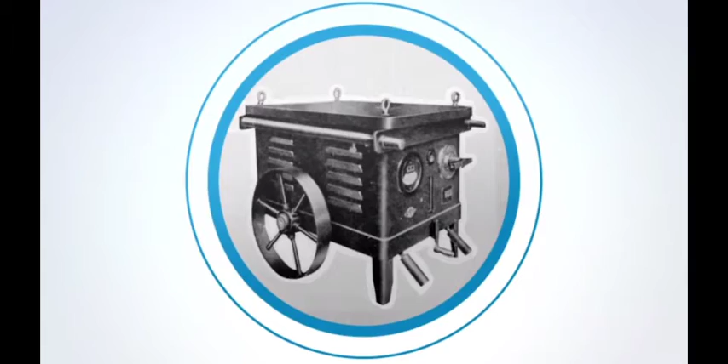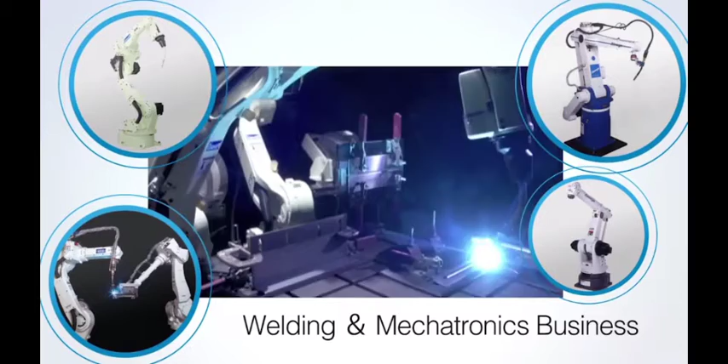In 1919, Daihen was established as Japan's first manufacturer of pole-mounted power transformers. Since then, Daihen has been providing many ultra-advanced technologies. We produce high-performance welding machines, utilizing all of our accumulated electronic technologies. And we produce industrial robots to meet increased automation needs. We have consistently developed semiconductor manufacturing equipment to meet the rapid progress of the electronics industry.

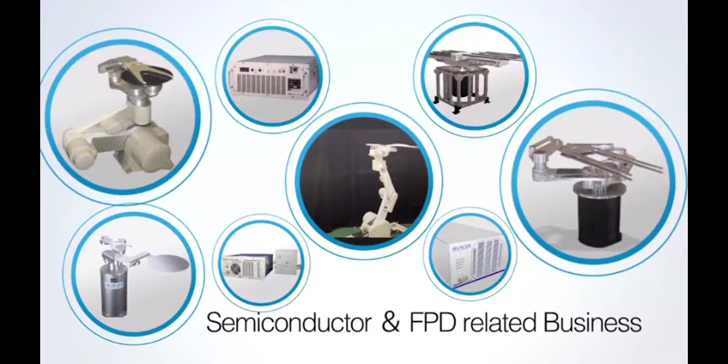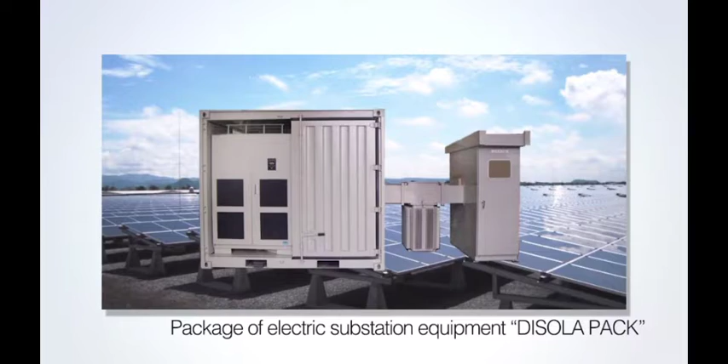And now, we are applying the technologies we have perfected in the highest levels of industry to the development of power conditioners for solar power generation, and generators for wireless power transfer, such as wireless battery charging for electric vehicles.

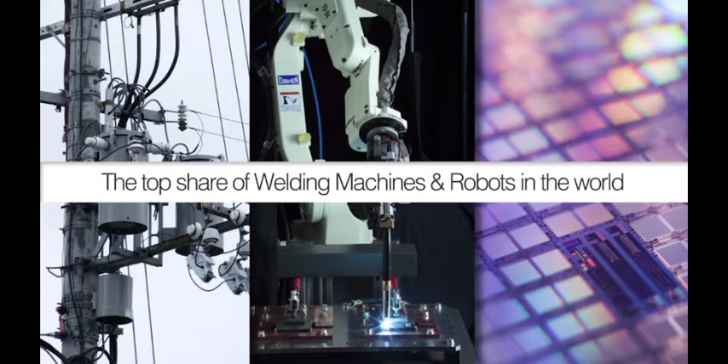Beginning with transformers, Daihen now leads the market in many fields, especially in the field of welding machines and industrial robots. We will continue to offer our technology with products to meet our customers' needs around the world. During this Automate 2015 show, we will introduce some of our high-performance products and solutions under the theme, Opening the New Era of Welding.

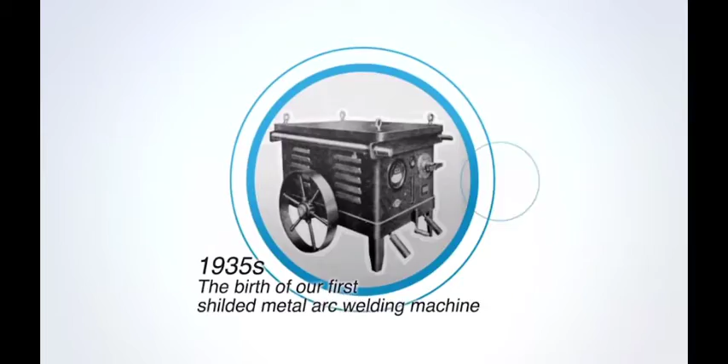First, let's begin with our Welbee inverter arc welding power sources. In 1935, Daihen delivered its first welding machine to the world, and we've been continually advancing our technologies. 15 years ago, we introduced our digitally controlled welding machine. Now, our welding control speed is 5,000 times faster.

After years of development, we've delivered our Welbee inverter series. Be Smart and Be Tough are the concepts of the Welbee product line. Welbee, the all-in-one welding machine, extensively improves welding efficiency. Welbee is low maintenance with the toughness to withstand the harshest work environments.

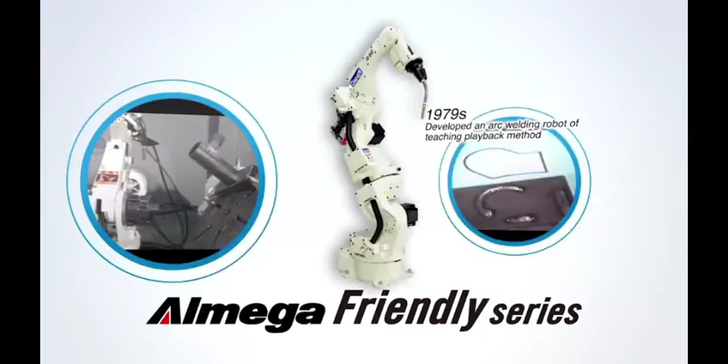Next is welding robots. In 1979, we developed our first teach and playback arc welding robots. Then, in 1991, we introduced the first Syncro motion control in the world for multiple mechanisms, including robots and peripheral devices. Now everyone can achieve high-quality welding with our latest FD-friendly series robots.

Our new wireless teach pendant, YTP, has improved controllability without cable interference. The 7-axis robot FD model enables the best welding posture for your job. Our new robot welding quality control system introduces the next generation of weld data monitoring and storage.

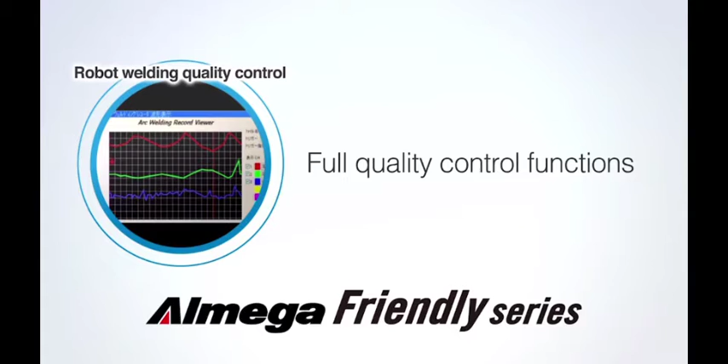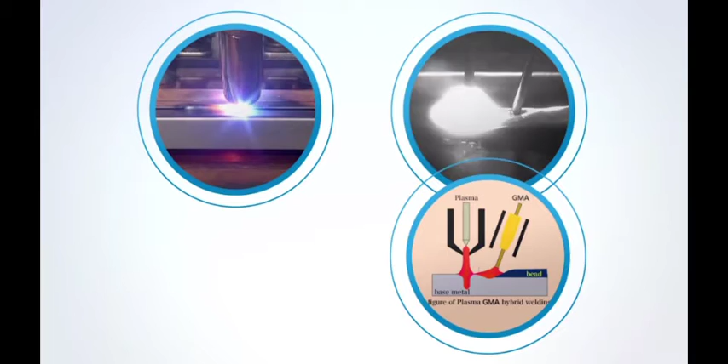Now, we will demonstrate our solutions for you, starting with the Welbee arc welding machines and FD-friendly series robots. With our extreme low spatter, low strain, high efficiency, and advanced quality control, we firmly believe our new arc welding solutions will satisfy even your most demanding requirements.

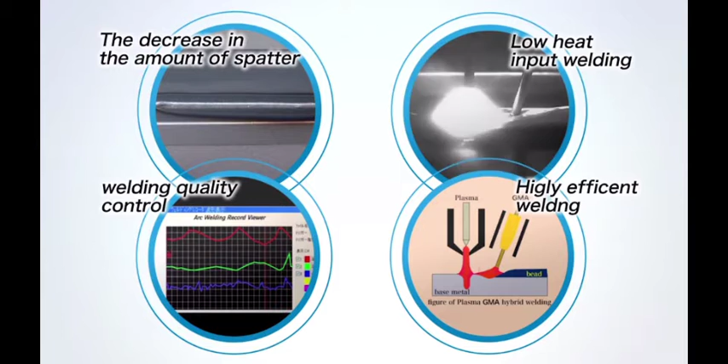All right, everybody, let's get this tour started. First, we would like to introduce our Ultraflex motion robot system. We will demonstrate the wireless teach pendant, YTP, and 7-axis robot, FD-B4S, which are newly developed by Daihen, the #1 arc welding robot manufacturer in the world.

The innovative YTP shown here significantly changes the conventional teaching operation. The user-friendly YTP eliminates the annoyance of the teach pendant cable and improves work efficiency. Furthermore, a single YTP can be used for multiple robots, teaching operation, and also as a monitoring terminal. Now, let us demonstrate.

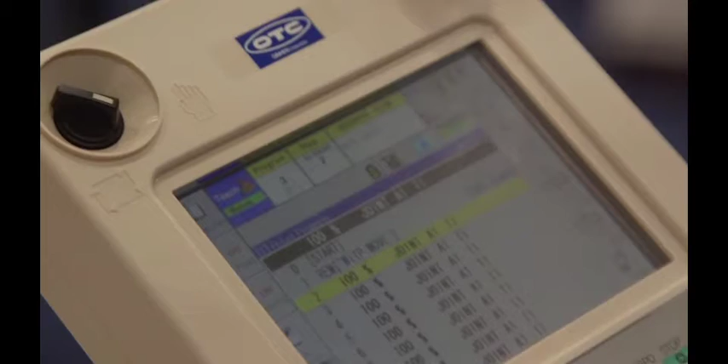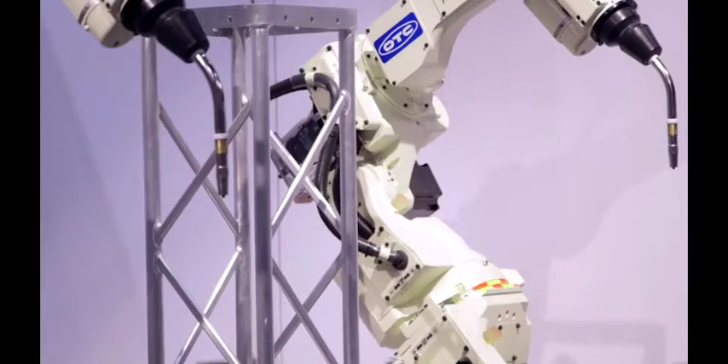As you can see, it can easily be operated without the interference of the cable, and it can control multiple robots. Next, we would like to introduce the 7-axis robot FD-B4S. On a conventional robot model, the welding power cable must be parallel with the robot arm. To your right is the 7-axis robot. Please look at the axis in the middle.

Daihen's 7-axis robot features a built-in power cable, giving it incredible flexibility for movement. Teaching a robot is not limited to the configuration of a jig or the layout of the parts. So now, let's show you what the 7-axis robot can do.

As you can see, there are no power cables interfering with the robot's work, allowing for a smooth, seamless operation. Next, please watch and compare the 7-axis robot movements to that with the 6-axis robot. To start, let's take a look at the 6-axis robot.

As you can see, the 6-axis robot has its limitation. When attempting this kind of part, it simply cannot make it all the way around to complete the job. And now, moving on from the 6-axis robot, I'd like to show you what the 7-axis robot can do. Please watch as the 7th axis comes into play.

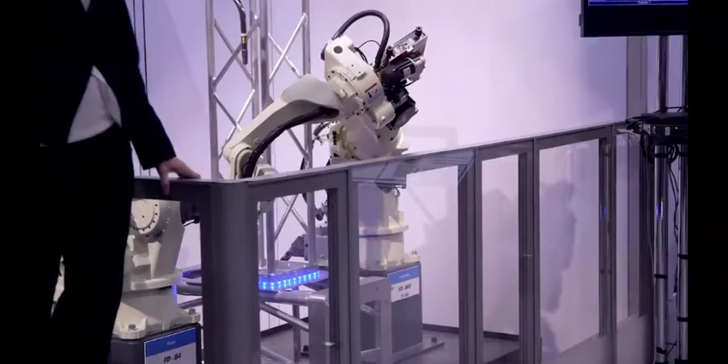As you can see, the 7th axis enables twisting more like a human being. Watch as the 7-axis robot tackles this difficult work scenario without a hitch, completing the full circuit. So what do you think? Can you see the potential for the 7-axis robot and its very high degree of flexibility?

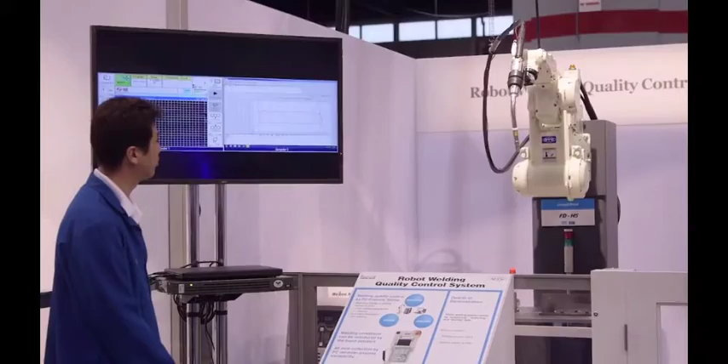The improvement of flexibility makes it possible to set the robot in a small space where existing models could not function. Now, let's move on to the next section. This section demonstrates our robot quality control system. We'll demonstrate 3 features of this welding quality control, including monitoring, storing, and analyzing.

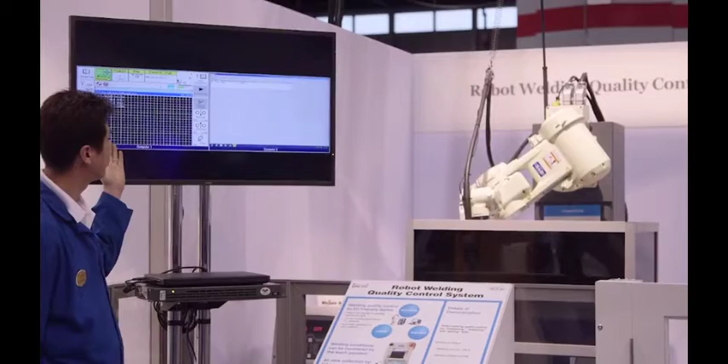Monitoring. During the welding operation, you can see the welding current, voltage and other welding data displayed as waveforms on the teach pendant. So now, let us demonstrate the welding operation, please. Please watch the right side monitor that displays the teach pendant screen. As you can see, the waveforms can be displayed in real time on the teach pendant, which is very effective in developing welding conditions.

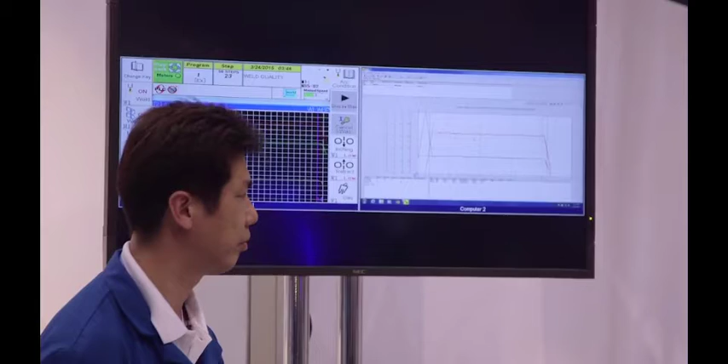Storing. You can collect current, voltage and other welding data at a high sampling frequency of 10 kilohertz, that's 10,000 times a second, and store them on a PC. As the information regarding when, where, what, and how are stored together, this data can be used for quality submission and for quality control as of ISO 9000.

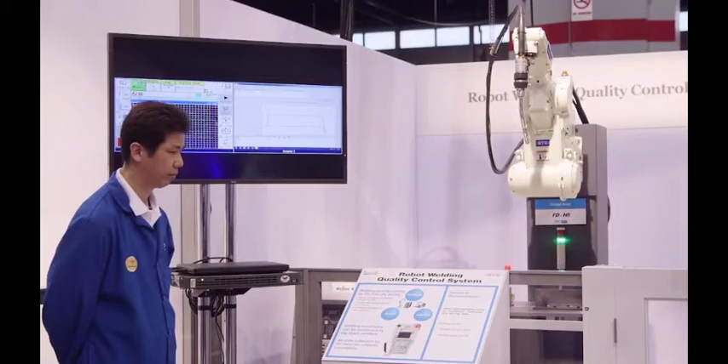Analyzing. Since any welding defects are automatically detected, the defective components on the next process can be avoided. In this demonstration, we have intentionally created a void in the plate, representing a defective part. Upon occurrence of a welding fault, an error is indicated on the teach pendant and the red blinking light illuminates. So now, let us demonstrate the welding operation.

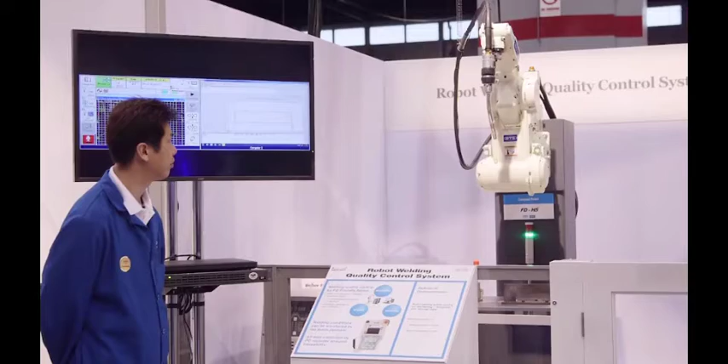In this way, any welding defect is detected, and these parts can be sorted, making it easy to rework the defective items. Furthermore, it is possible to view the waveforms of stored data to see the welding conditions. This will be useful for the identification of the cause and the prevention of the recurrence. Now let's move on to the next section.

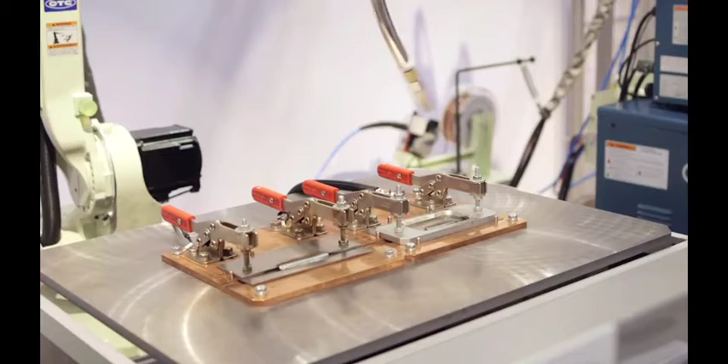In this section, we're introducing the Synchro-feed GMA welding system, our latest solution in providing low spatter welding with argon gas mixtures or even 100% CO2. This system consists of a super fast wire feeder control and a Welbee inverter P500L, which synchronizes optimal current with wire feeding. This is an ultra high quality welding system that reduces spatter like never before.

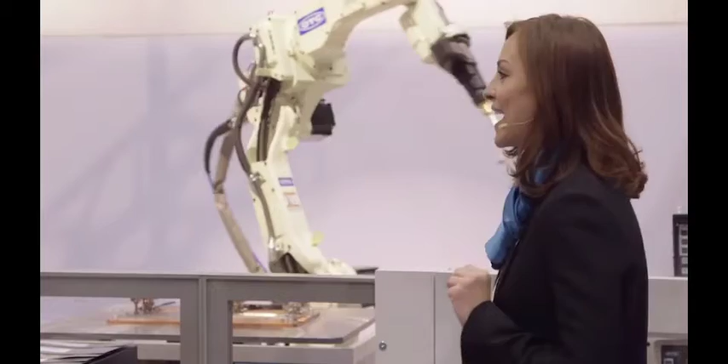In the first demonstration, 0.6 millimeter ultra thin mild steel plate is lap welded, common to automotive body welds and the like. The wire diameter is 0.045 inch, the welding current is 60 amps, and the travel speed is 20 inches per minute. We're using 80% argon and 20% CO2 shielding gas. You can see that almost no spatter is generated and stable welding is achieved.

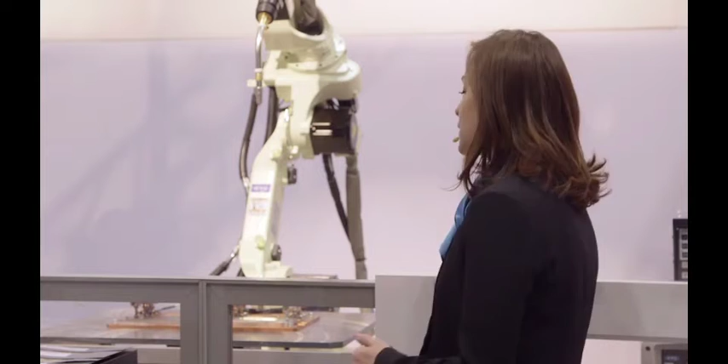Next, 3.2 millimeter thick mild steel plate used for automotive underbody parts is welded at 260 amps with a travel speed of 27 inches per minute, which is generally said to cause excessive spatter. Let's get started. Extremely low spatter welding is attainable from thin to medium plate thickness. The samples are displayed here. Please take a moment to see the high quality welding results of synchro-feed GMA welding.

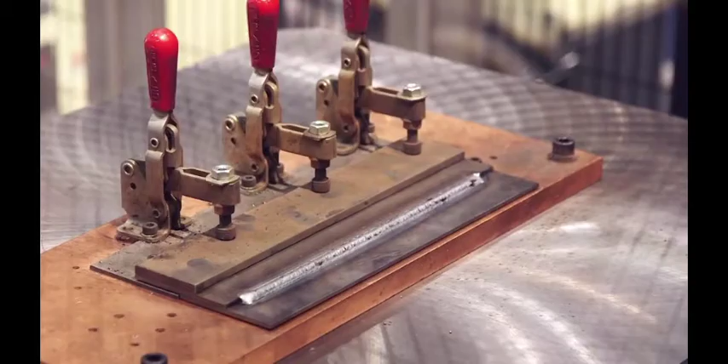Now let's move on. This section demonstrates cold tandem GMA welding with extremely low heat input compared to conventional welding. The arc is generated by the lead wire with the non-conducting cold wire inserted into the molten pool from behind. The molten pool is cooled down as a result, enabling welding with low heat input and less heat distortion.

Next, in this demonstration, 3.2 millimeter mild steel is lap welded at 300 amps with a travel speed of 42 inches per minute and filler wire speed of 120 inches per minute. If you would, please.

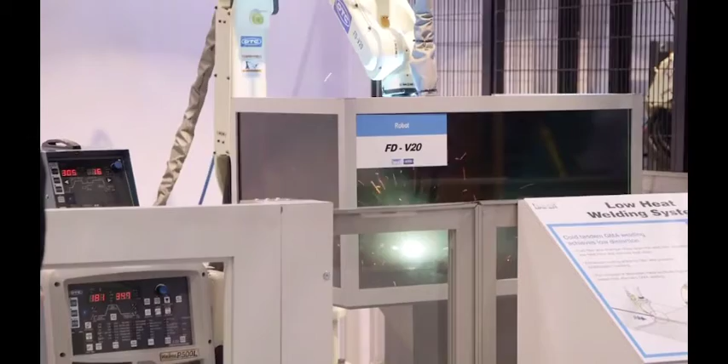We have welded samples here. Please take a moment to compare the heat affected zone to that of the existing welding methods.

Now, let's take a look at the pre-engineered Servo Arc 720B. It is a basic model robotic arc welding system designed for small and medium-sized parts with minimal operator movement, making it a great ergonomic choice.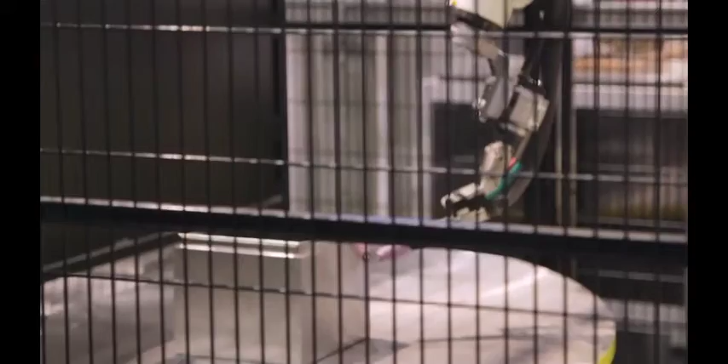Like all OTC brand robot systems, this servo-controlled 72-inch turntable package comes with a wide variety of GMAW, GTAW, and plasma cutting machine options that seamlessly integrate to create today's latest robotic arc welding technologies.

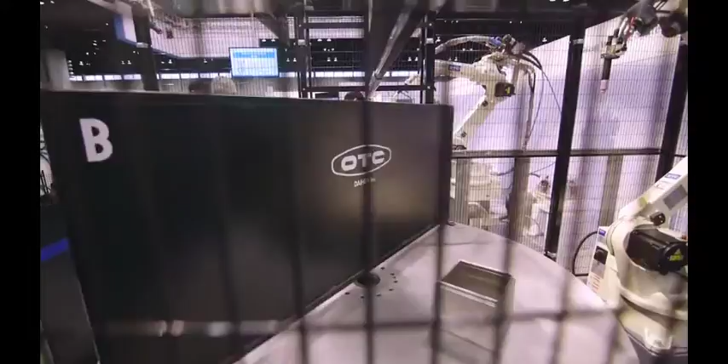As you can see, OTC Daihen offers a generous selection of pre-engineered arc welding robot systems, whatever your needs may be. Be sure to ask an OTC representative about the full line of compact, plug-and-play, and heavy-duty systems we offer.

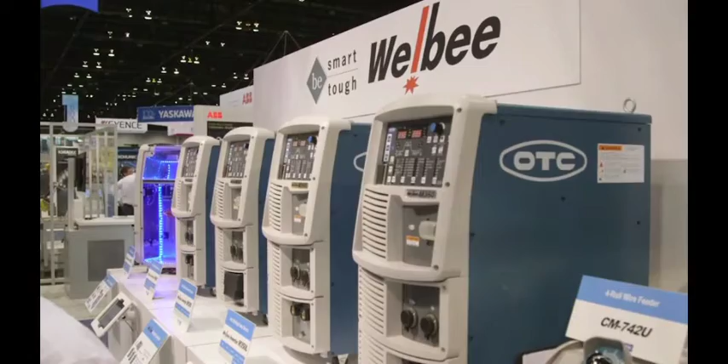Now, directly behind you, you'll see our lineup of Welbee products. We are an all-encompassing welding equipment manufacturer, so we have a product lineup for different capabilities and various processes.

These Welbee models are multi-process, manual or robotic welding packages with unique features and benefits for virtually spatter-free GMA welding of nearly any type of metal, from carbon steels, stainless steels, aluminum, and other super alloys. They're also capable of TIG and stick welding if needed.

The Welbee series is the world's first nanotechnology welding machine, providing drastically improved performance by Daihen's exclusive Welbee processor chip. Welbee can process information 5,000 times faster than our first generation of digital inverters, developed in 1996.

We currently offer 5 Welbee models ranging from 350 amp standard models for high-quality general-purpose applications to 500 amp GMAW pulse and ultra-low spatter models. Welbee also enables welding quality management with your personal computer or tablet.

This is the Welbee Welding Monitor. Recently, due to ISO and product liability requirements, welding data is often recorded as part of a large product quality support system. Also, the ability to record real-time welding data for analysis from the factory floor is becoming a requirement.

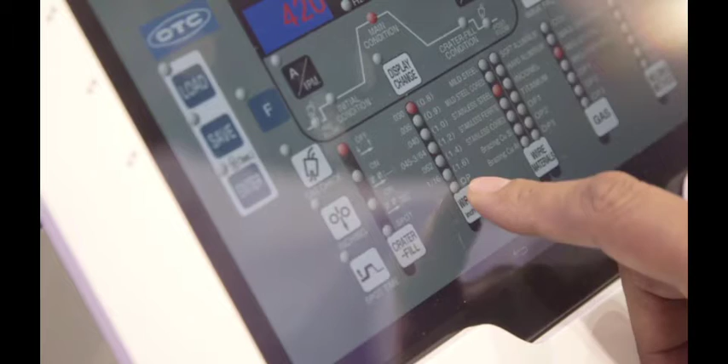So, we've introduced a system to monitor our Welbee machines collectively via Ethernet. This enables quick data checks when problems are experienced and allows for uniform control of multiple welders.

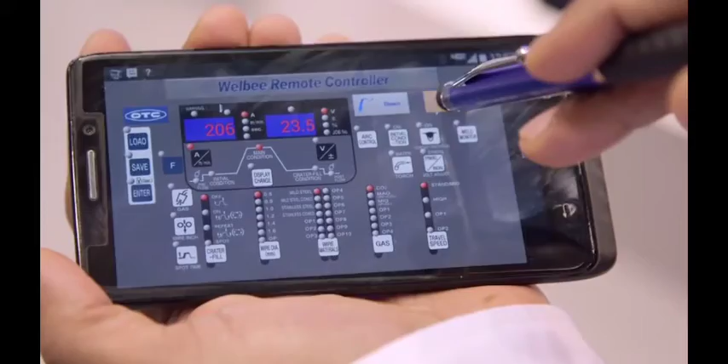In addition, the Welbee remote controller, which enables operation with a tablet, can be used from distant locations for changing welding conditions, collecting welding performance data, and allows the user to consult the welding machine's operating manuals for reference.

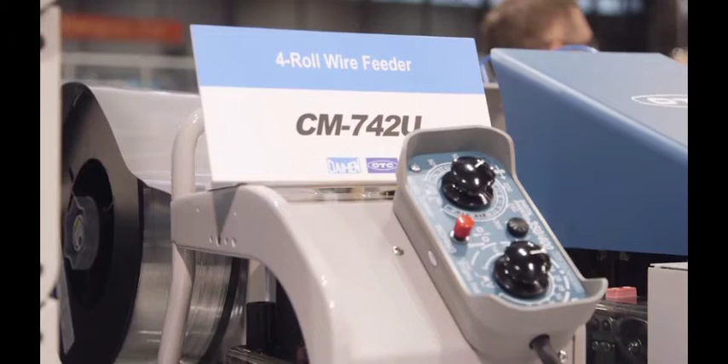Now, let's take a look at the wire feeders. The standard model CM742U wire feeder is the most compact, lightweight, 4-drive roll wire feeder on the market, with controls built in the power source rather than the wire feeder for unmatched reliability in rugged environments.

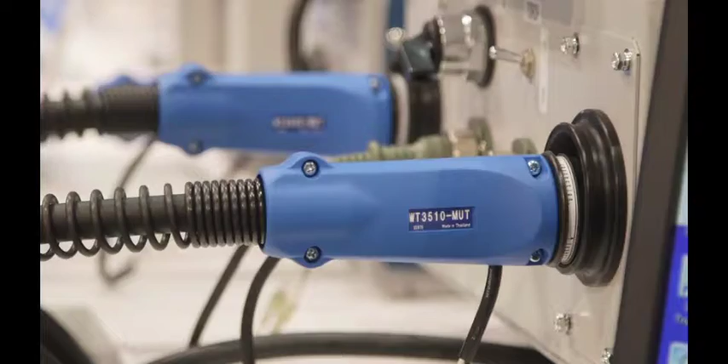The Tweco-style torch connection accepts OTC and virtually any other brand torches, and several optional kits, including an aluminum kit, are available for increased versatility. You can also see our new CMD742U model dual wire feeder, allowing 2 types of welding wires to be used on the same unit, allowing even more flexibility.

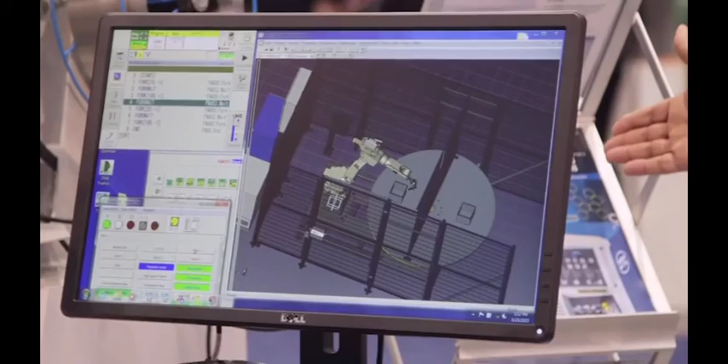And finally, we're demonstrating our FD robot simulation software for offline teaching of robot tasks, including automatic welding path creation, simulation of precise cycle times, and setting of welding conditions and PLC programs. You can also check the ideal torch posture to ensure the best welding results.

As you have seen, under the theme of opening the new era of welding, Daihen has provided several varieties of solutions with our Welbee and FD series.